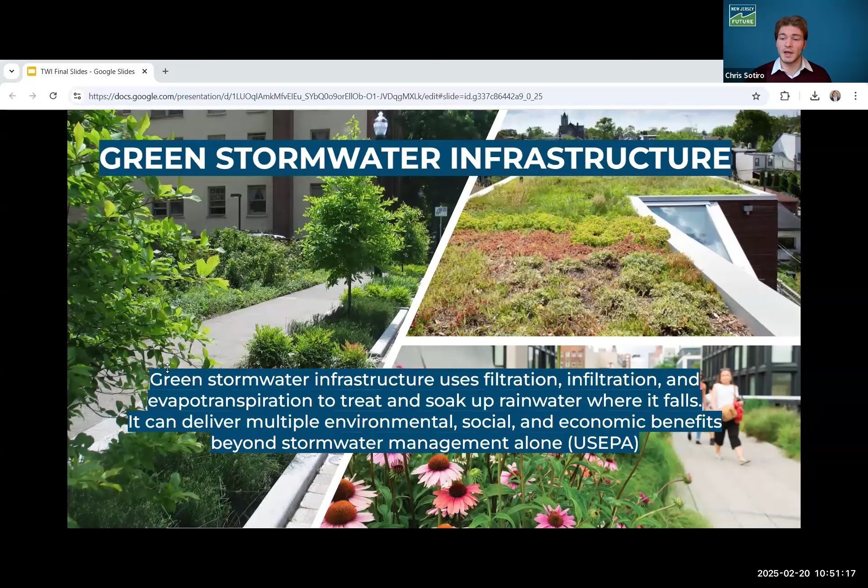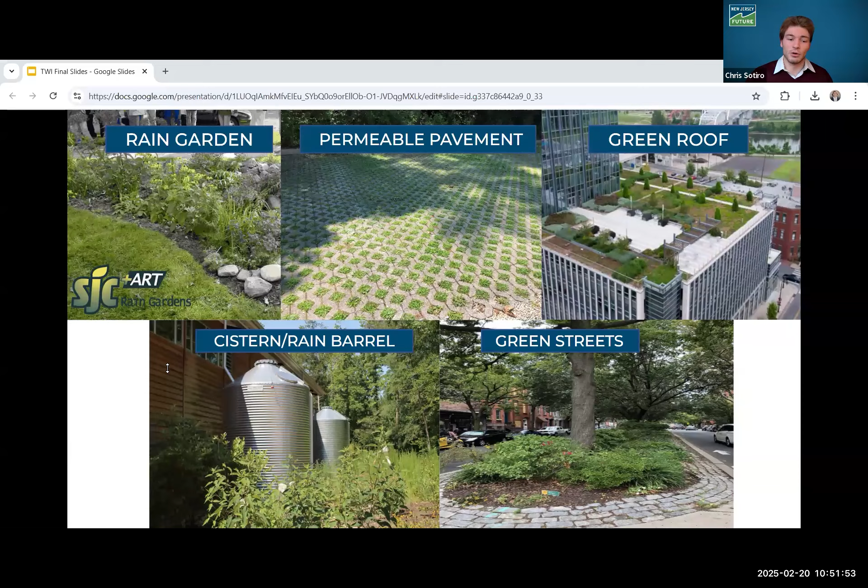So here are some examples of green infrastructure. We've got rain gardens, permeable pavement, green roofs, which are the sexiest of green infrastructure, cisterns or rain barrels, green streets. So aside from just stormwater management benefits, there's also massive benefits to speak about aesthetic improvements. They can raise property values in your area. And there's also a whole other conversation about reducing the urban heat island effect by cooling your municipality and local area.

So stormwater is a growing problem. Our state and larger region in the Northeast has been experiencing heavier and more frequent rainfall. As we continue to develop, we have more pavement, more impervious surfaces, which leads to more stormwater, more frequent flash flooding, and also leads to other end results such as street closings, property damages, sewer overflows in some more urban areas of New Jersey where we have combined sewer systems that can literally leak raw sewage into the streets during high rainfall events, damage infrastructure, and impaired waterways as well.

In New Jersey, over 90% of our waterways are still considered impaired, and that's no coincidence. We are the most densely populated state, and with that comes pretty extensive development. So every time a Walmart or a neighborhood goes up with parking lots and roads the size of football fields, all of that impervious surface cover is inhibiting the land's ability to absorb rainwater into the soil.

So when enough of that development occurs, combined with rising precipitation patterns caused by anthropogenic climate change, you're left with some very serious problems. So over 500,000 households in New Jersey are at serious risk of flooding, which equates to 1.2 million residents, according to the Federal Reserve Bank. We also are experiencing anywhere from 4 to 11% yearly increase in precipitation rates across the state, which will continue through 2050. Freshwater wildlife populations have also fallen by 85% since 1970 from monitored populations.

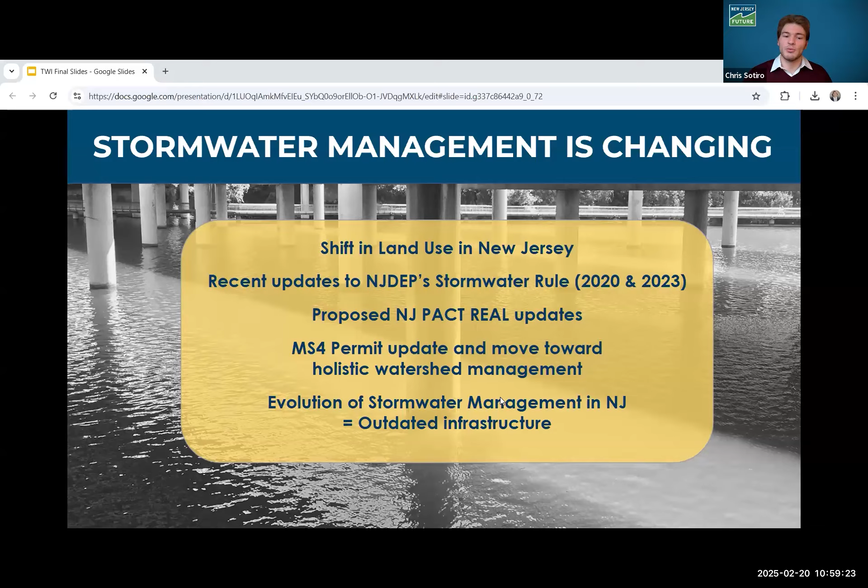So all this to say, what you have now in the Garden State is a situation where we are highly built out, highly developed. Some might even say overdeveloped. And a lot of that development occurred prior to 2004, prior to 2020, prior to 2023. And therefore, we have a lot of opportunities for retrofits. So there's a lot to take in, lots of rules, lots of regulations. And I know you must be thinking, man, I wish there was an organization, possibly two organizations, that took the time and care to put together a resource that provides municipalities, counties, nonprofit organizations, developers, and even individual property owners with the tools to identify opportunities for retrofitting these outdated stormwater infrastructure systems and to comply with all of these new pesky regulations.

That is why we partnered with Princeton Hydro, a water resources and engineering firm, to create the Stormwater Retrofit Best Management Practices Guide. This guidance document provides best practices for retrofitting stormwater infrastructure to improve functionality. It includes natural features such as green infrastructure and also provides some very helpful case studies of successful projects right

here in New Jersey. A stormwater retrofit essentially aims to modify the existing drainage systems to further improve stormwater control and treatment practices. This can include improving or enhancing the function of older, poorly designed, poorly maintained stormwater management systems. Retrofits can also reduce volume, filter out pollutants, increase groundwater recharge, and help mimic pre-development hydrology.

So, thinking about these systems as a whole is very critical when implementing retrofits, and in some cases, thinking outside of the box for what defines a retrofit. So, things such as floodplain reconnection or stream restoration may be the best option for the community or the environment or the specific site. So, the ideal stormwater retrofit will control peak rate, reduce runoff volume, and treat water quality among a whole host of other benefits.

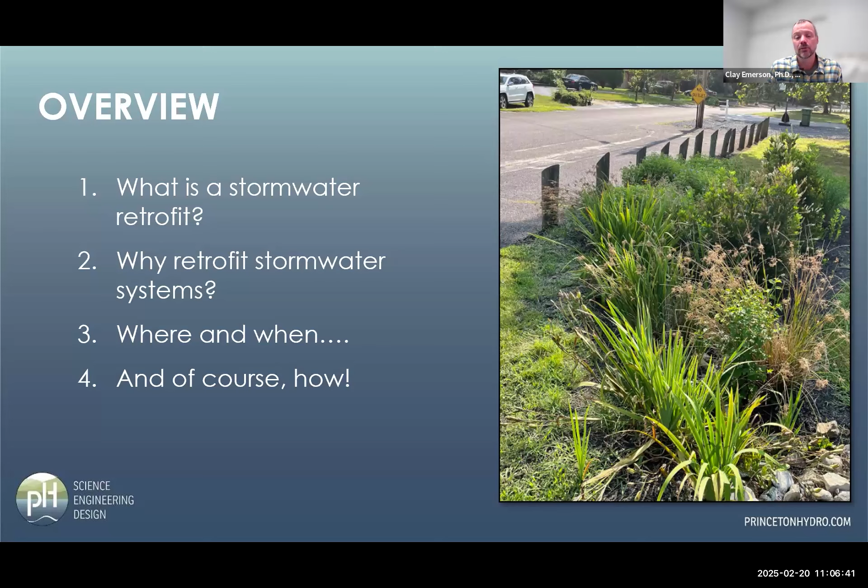And one thing that we talked about early on in this process was, the word retrofit kind of implies taking something and changing it into something else, and the guide kind of expands on that definition, and so we're not just taking an existing stormwater feature and improving its functionality. In many cases, we're adding a new structure into the built landscape. So retrofitting green infrastructure into the existing built landscape. So a little bit broader definition.

So when I say existing system here, I don't mean necessarily an existing stormwater detention basin. Obviously, I'm going to talk about that. That's a great retrofit. But it can be a lot more than that. The classic engineering kind of concept is, well, you got a pipe that takes runoff perhaps into this lake. And everyone who lives on this lake, their property value is innately tied into the water quality of this particular lake.

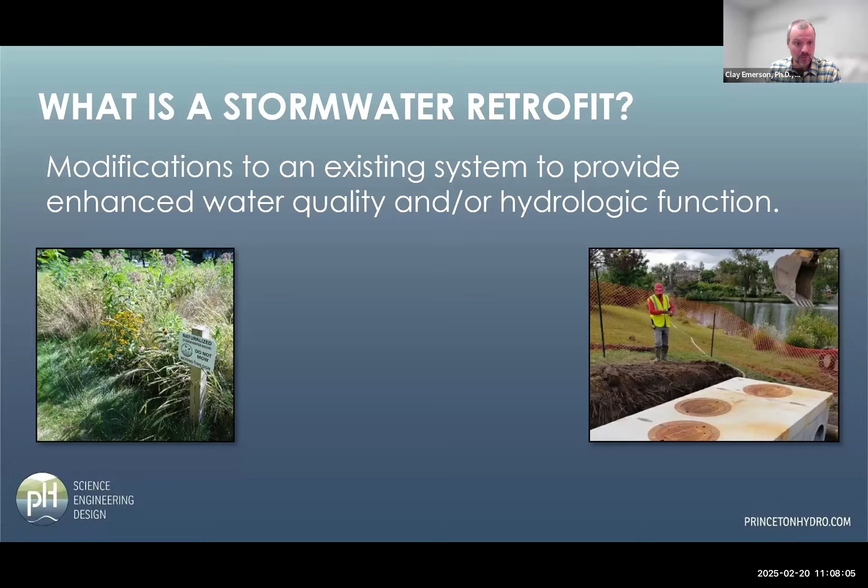Let's be engineers and cut the pipe and drop a big precast chunk of concrete with some filters in it and fix that problem. And yes, that's a stormwater retrofit. And yes, those things work, especially in lakes where you might have a few, sometimes very few, stormwater outfalls. Things like this can really be beneficial as well. But the more modern green infrastructure approach, taking naturalized systems and bringing them into engineered places like stormwater management basins, existing basins, is another one.

But I think, and the manual talks about this, my definition of green infrastructure goes a little bit beyond a rain garden. To use an example in our built landscape, what about say you have a 400 or 500 acre drainage area, all of which was developed with no stormwater controls? What about taking an existing impacted floodplain or wetland and adding some light engineering touches to try and not just improve the already impacted wetland that's been impacted from decades of uncontrolled stormwater runoff, but trying to kind of restore, to a certain extent, the hydrology and the people who deal with that altered hydrology downstream by, for example, expanding the floodplain in these areas and doing some other things.

So a stormwater retrofit may not just look like the box. It may not just be a naturalized stormwater basin. I think some of the best ones, the most functional ones, the most resilient ones, the ones with some of the most ancillary benefits are those that really just look like a natural system.

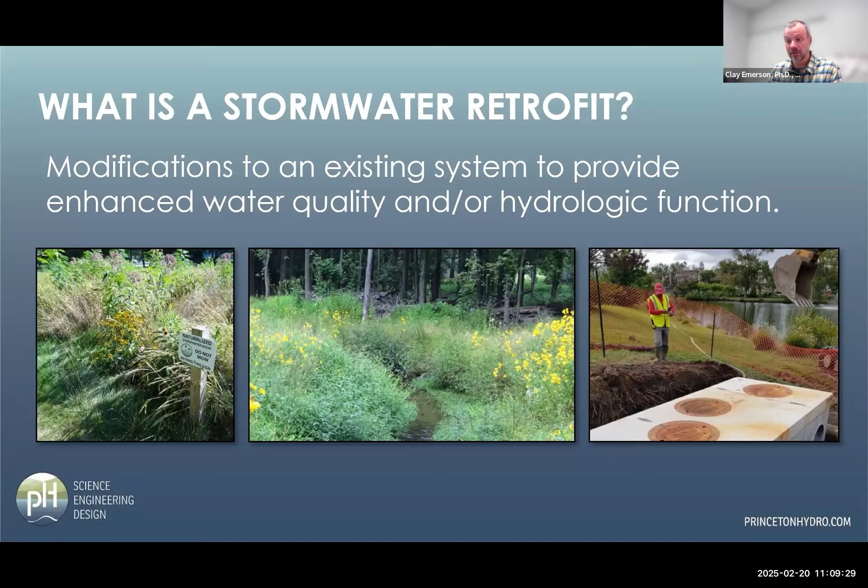So I've got some screenshots of things from the guide. I just called it a manual. And we do focus on some specific things. And again, it's written to guide you through the concept and not be overly prescriptive. Yes, there's kind of a matrix of what is your target, what type of systems should you be looking for, and what's a relative cost, but there really is no one size fits all. What is good though is that retrofit approaches are flexible and can be implemented to fit nearly all applications.

I mean, we're working in the built environment, and I'll have some slides like this. And there's no doubt that between property ownership, functional site concerns, existing infrastructure, there are, I don't want to call them limitations, but you got to work within the hand that you've been dealt. And sometimes that is difficult, but there's a lot of different approaches, and usually you can get something to fit in. And as Chris outlined, there's usually no shortage of sites. There's a lot of unmanaged, uncontrolled impervious cover in New Jersey, and so you usually have sites to choose from.

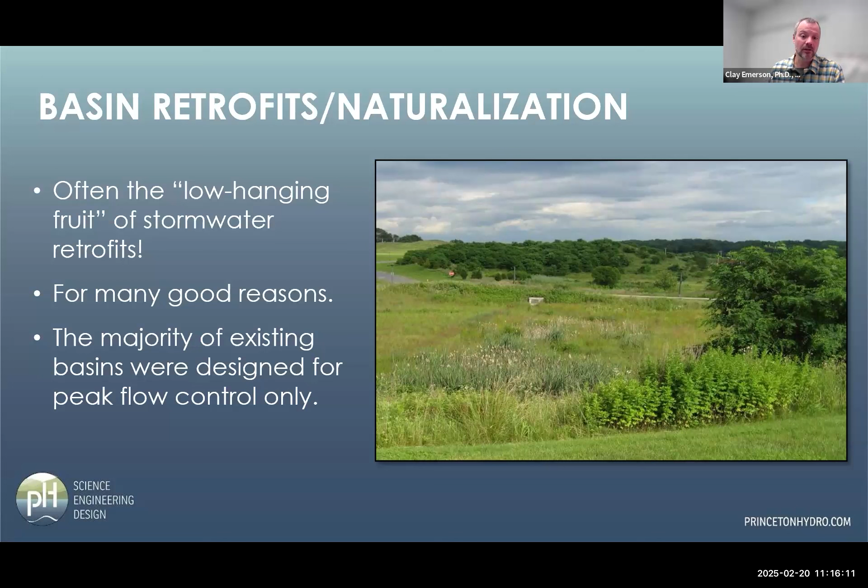And our impacts aren't the conventional tillage that they referred to. They're the damage that was done during construction, whether it's compaction from the rubber tire equipment, or just the fact that these are usually excavations that have taken the topsoil, the more highly organic component of the soil, and done away with it completely because you have a 4-foot hole in the ground down into the B and C soil horizon. So a lot of good discussion there that is relevant here.

So the retrofits in New Jersey, hey, what's not to like? Plenty of bad examples of detention basins to pick on. These are two that I've picked on before, but you can drive around and see for yourself the vast array of stormwater detention basins that we have. I said these things are not really designed at all for anything other than peak flow control, and I think these photos speak to that.

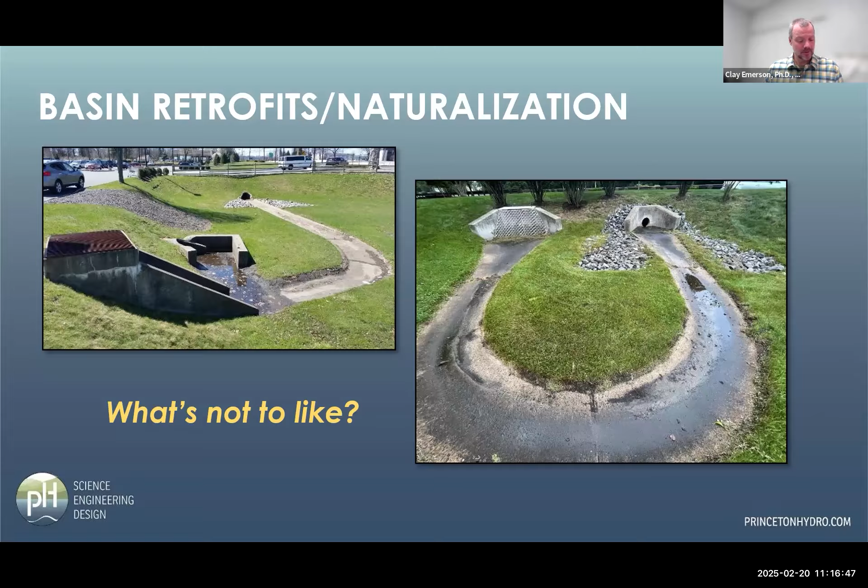All right, so what makes a good candidate? Here's an excellent candidate for a couple quick reasons. You see the concrete low flow channels. You see that even the turf grass is still having trouble providing full coverage. Obviously, it's a dreary winter photo, but you can see some evidence of that. What you don't see in this photo is homes, right? This is kind of out of view to a certain extent. You see a road in the background. So this is screaming mid 80s construction here in New Jersey, and one that would make an excellent candidate.

Room for improvement. In any kind of retrofit scenario, and maybe a little less so for just a naturalization approach, you must respect or improve on the original design function and hydraulic performance of the system. And that entails doing some calculations and ensuring that you're at least providing what this was required to provide originally. And it may just entail minor changes to the operation and maintenance, assuming some of that is happening to begin with.

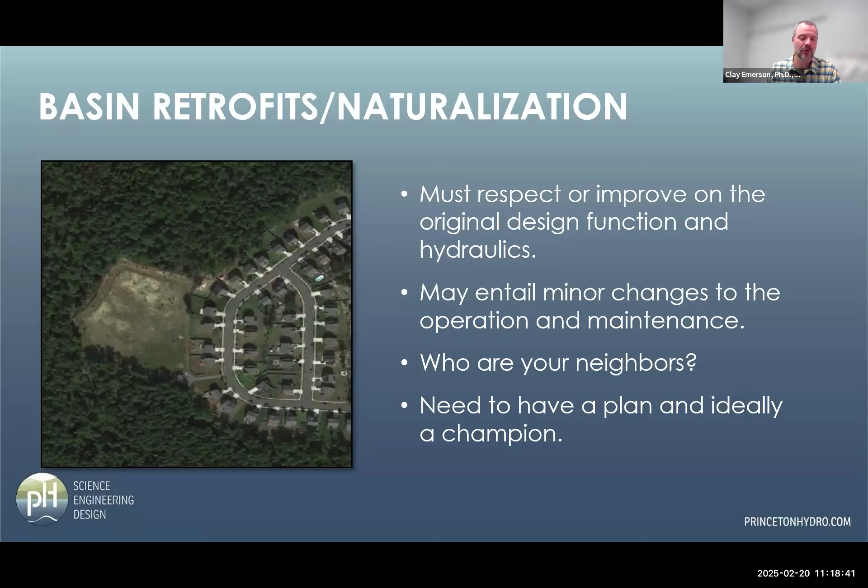Key point here, the third bullet point, who are your neighbors? So there's, I think, 150 homes in this particular development. I've kind of cropped it here in the photo. And 145 of them don't even know that there's a stormwater basin back here. But 5 of them think that it's their personal backyard. So knowing your neighbors, having a champion, and that communication that Aaron will talk about is truly important. It must fit the opportunity.

Another one, a retrofit that was just some very minor grading and some soil improvements to undo that damage during construction, got this basin. They were already getting complaints from the township on their basin, and a simple naturalization there with some very minor grading and outlet structure modifications more than fixed their problem.

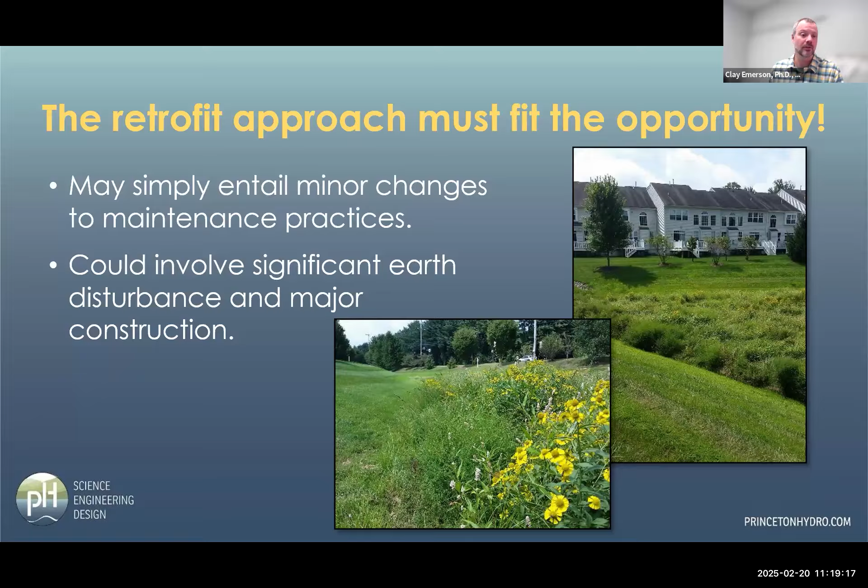So it could just be minor things like that, or it could really be, let's start from scratch here. This basin isn't what we wanted, perhaps in this case from an aesthetic or an ecological value. Let's totally destroy the thing, like haul out the outlet structure, bring in a new one, totally regrade the site. And these are before, or I should say during and after photos of one of those retrofits. So it really can be anything in between.

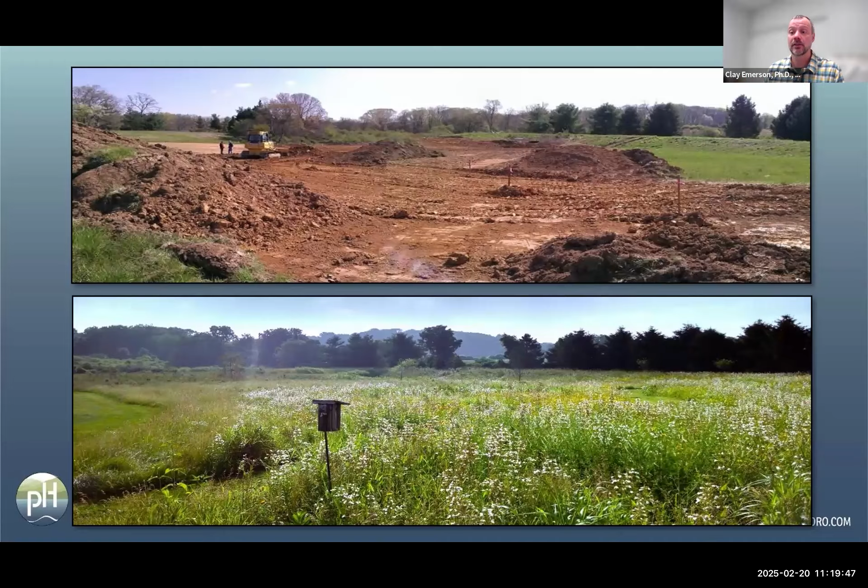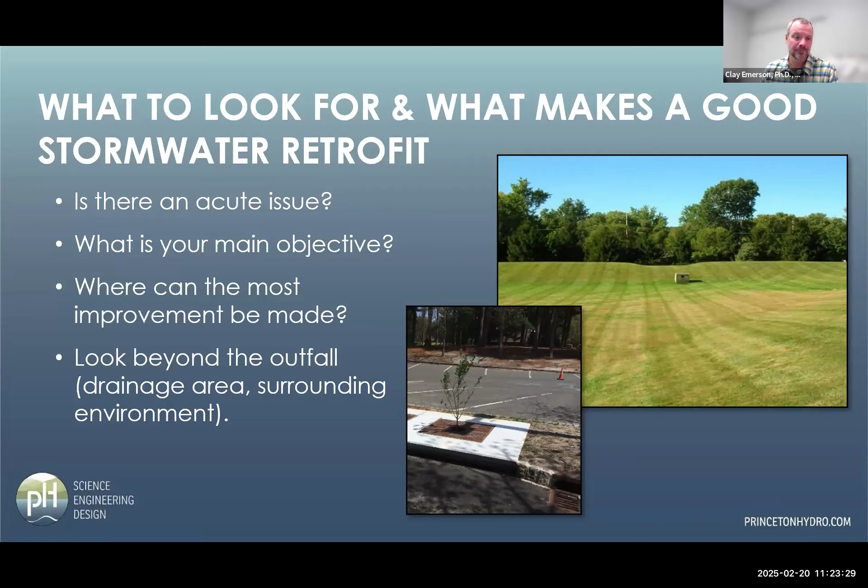So what to look out for, what gets in the way: in the built environment, utility conflicts are everywhere. Moving a lot of earthwork or exporting or importing soil is a big cost killer. So if you're trying to expand a floodplain or expand an existing basin, and actually do some earthwork, some cut to maybe tackle some additional flood mitigation, that's great, and you should do that. But if you have a place on site where you can place that in a way that doesn't impact any regulated areas or any other issue, that's going to really save on costs. As soon as you start loading material on trucks and moving it around, you're going to be hitting the wallet pretty hard. Have realistic expectations and look out for unintended consequences and things like that. The more developed a landscape, the more difficult this is.

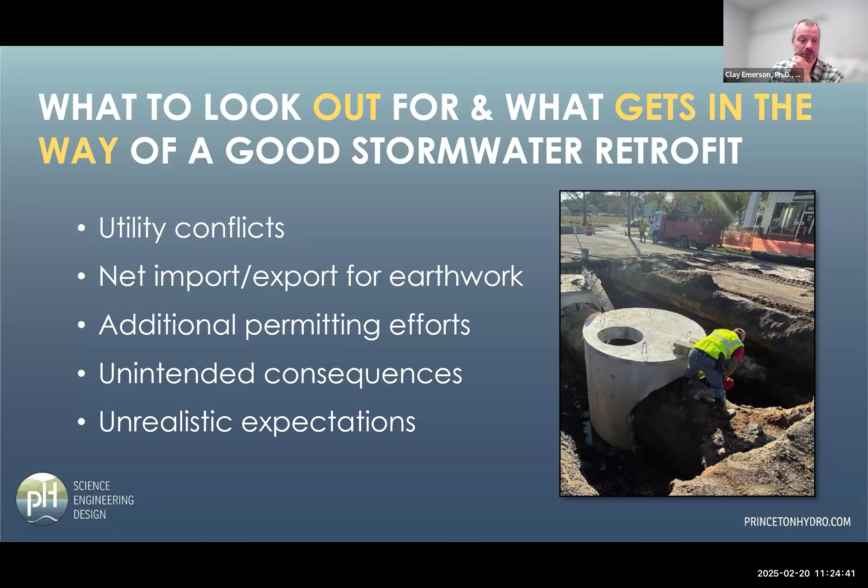So to wrap up, most of the main O&M considerations revolve around the vegetation. Is it going to be more of a manicured approach, or is it just, what's the mowing frequency? What's your tolerance for invasives?

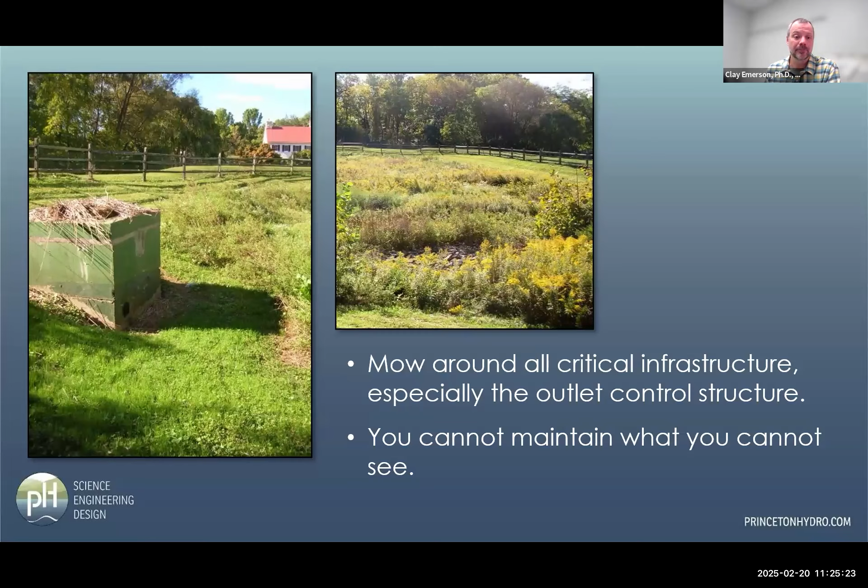Mowing around that outlet structure is key. You can't maintain what you can't see. And generally, mowed edges show intent, and I think to the average person they show that intent and improve the overall aesthetics or the likelihood of that kind of system being accepted.